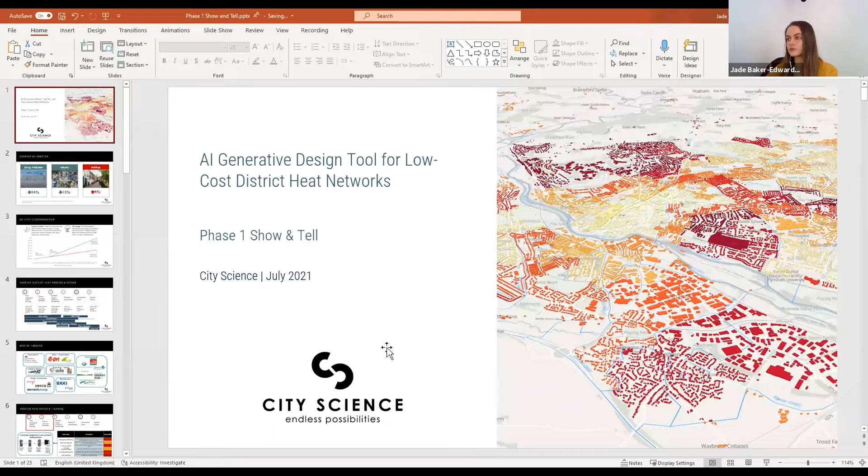Can you see that okay? Yeah, that's great. Fantastic.

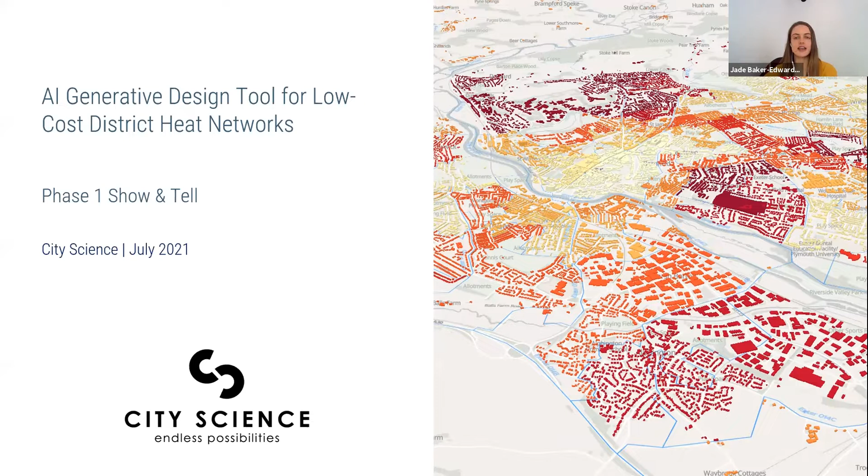Okay, so hello, my name is Jade. I'm an energy and sustainability consultant at City Science, and I'm the project manager of this project. So welcome to a quick summary of the outputs of our feasibility study entitled AI Generative Design Tool for Low-Cost District Heat Networks. So firstly, our key objective at City Science is to build tools and provide services that enable decarbonisation at a city and national scale. We focus on the three major CO2 emitting sectors of transport, domestic and commercial.

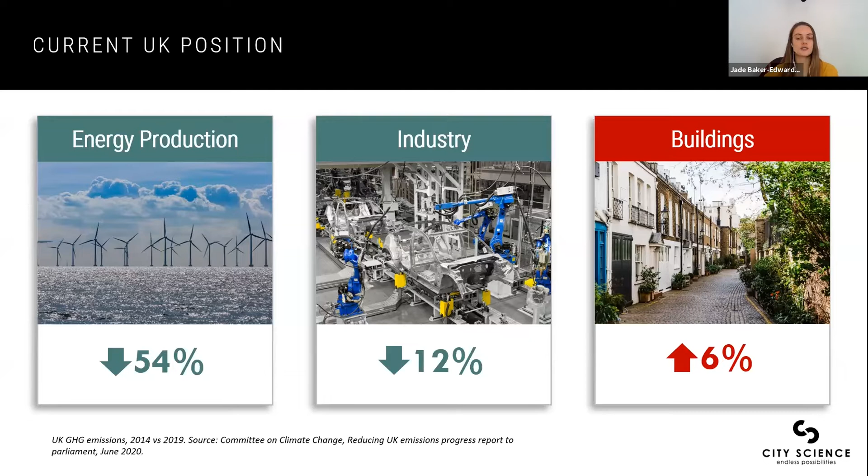And as a landscape, between 2014 and 2019, carbon emissions in energy production have decreased by 54% and industry by 12%. However, carbon emissions from buildings have increased by 6%. This indicates that building energy decarbonisation is a significant factor in achieving net zero. A majority of the energy used in commercial and domestic buildings is expended through space heating and hot water. For domestic buildings, this contributes 75 to 80% of energy, and for commercial, it's 50 to 60%.

There are two approaches for the UK to decarbonise buildings. One is to reduce the amount of energy used, and the other is to shift to low carbon heating sources. Now, the UK plans to address the shift to low carbon heating sources by scaling up the number of homes served by district heat networks. The government's 2050 target of 90 terawatt hours of heat served by heat networks per annum translates to around 6 million homes. However, our modelling suggests that at the current run rate, we will only reach 49% of this target, leaving us 3.2 million homes short.

So as part of our early research, according to HNDU funding applications, we found that over the last 3 years, only 25 large-scale district heating feasibility studies have been conducted per year. And our modelling suggested that only 52% or 13 networks progressed to build. So it's clear that intervention is needed to enable the scaling of district heating at a much faster rate. And this is a statement that was repeated by the many stakeholders that we engaged during the study. So the question is, how can we increase the number of studies conducted, and how can we increase the number of studies that then progress to build?

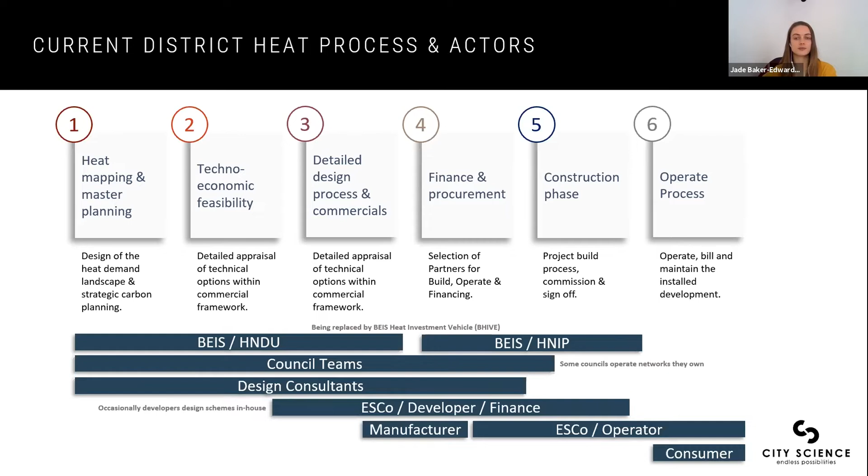To understand the barriers to scaling and how the design processes can become faster, we started by documenting the process to understand the steps, the stakeholders involved in each of those steps, and when and how each of the participants interacts with the system. Then we designed a user-centric feedback process to ensure that we engage with at least one participant who interacts in each part of the process. So in a highly human-centric approach, we interfaced with all the organisations you can see on the screen. So this scoped government bodies, those in regulations and policy, large and small design consultancies, of course the ESC as industry advisors, manufacturers of the components themselves, ESCOs and local authorities.

And the local authorities scope those who are highly engaged in district heating already, such as Islington, and those who aspire to be. So this approach gave us a comprehensive view of the pain points within the process and the pain points within the industry, and really provided feedback and validation throughout everything we produced moving forward. So each user had a different perspective on the approach that should be undertaken by us and had a unique set of requirements. And the engagement with the stakeholders consisted of one-to-one interviews, workshops, interactive feedback documents, videos, and surveys.

So in our discussions with the participants about the pain points, we found that the most significant delays occur during the first two phases, which is heat mapping and master planning, and the techno-economic feasibility stage. This is why our final solution is a tool that uses AI and generative design to automate the process of district heating feasibility studies. Out of the 13 common pain points that we identified, we created a solution for our new application that solved 6 of the critical issues in the process.

And these are incorrect or incomplete demand data, the many iterations and rework time needed to make the designs acceptable for all stakeholders, little incentive for developers to prove viability, competing stakeholder objectives, perceived value, and lack of access to capital because of the high perceived risks.

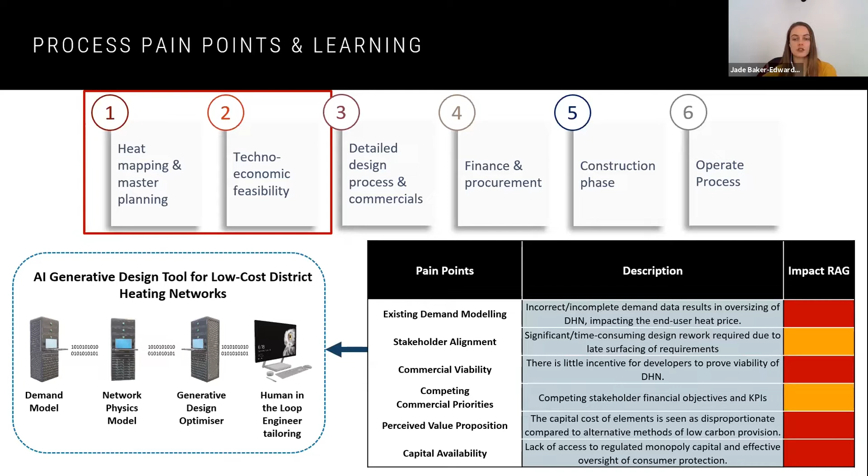We then produced our application design based on this user-centric requirement capture approach, which allowed us to have a single solution with the most buy-in. And the back end of the tool uses a demand model, a network physics model, a generative design optimizer, and human-in-the-loop engineering, which I'll explain in a little more detail in the next slide.

So the core of the application has two optimization loops running generative design. So in step one, the user inputs the details of their preferences and any constraints they may have. Then we run through the two loops. The first is the network physical design loop, which looks at the routing of the network. And the second loop then looks at the network equipment like pipes and heat interface units. Finally, the AI generative solution options are published into the human-in-the-loop design space.

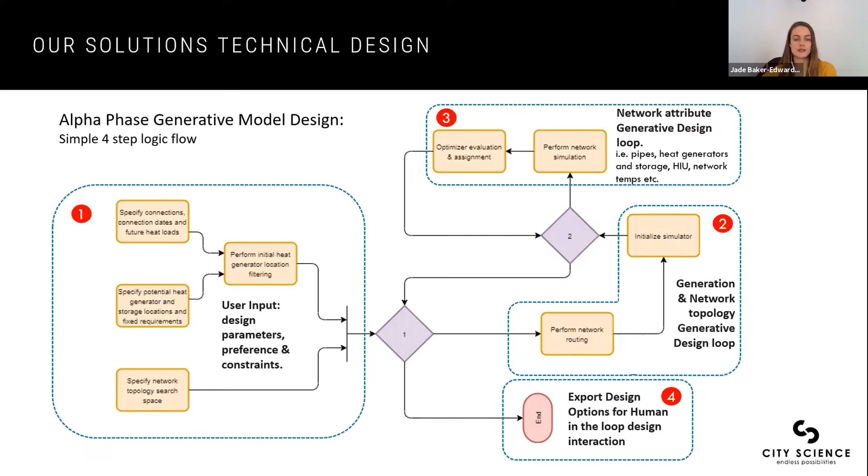Touching on the value proposition, the tool is aimed at design consultancies and local authorities. Design consultancies currently use a very manual Excel-based process, and it takes a long time to implement changes to designs. Local authorities who are engaged in district heating networks and have in-house skills will also be able to use the tool. Looking to the future, as government policies and targets place requirements for additional heat networks, it's likely that more and more local authorities will increase their capabilities and will also be able to use the tool.

And in addition, if local authorities can use the tool to quickly and cost effectively determine whether a district heating network is feasible, then the requirement of holding a heat network in a new development can be stipulated in the contract rather than leaving the decision up to reluctant developers. So although aimed at those particular stakeholders, the tool has been designed in a way to appease the pain points from stakeholders across the board to promote a seamless process, provide detailed information early on, and provide designs that are accepted by all.

So another aspect we heavily engaged with users on is the user interface prototype. Initially, a survey and discussions in stakeholder meetings informed the development of version 1, which included the key functionality of the tool. And following presenting the version 1 prototype to users via various means, feedback was gathered in order to inform the version of the user interface that you're about to see. And that's currently designed as a web application.

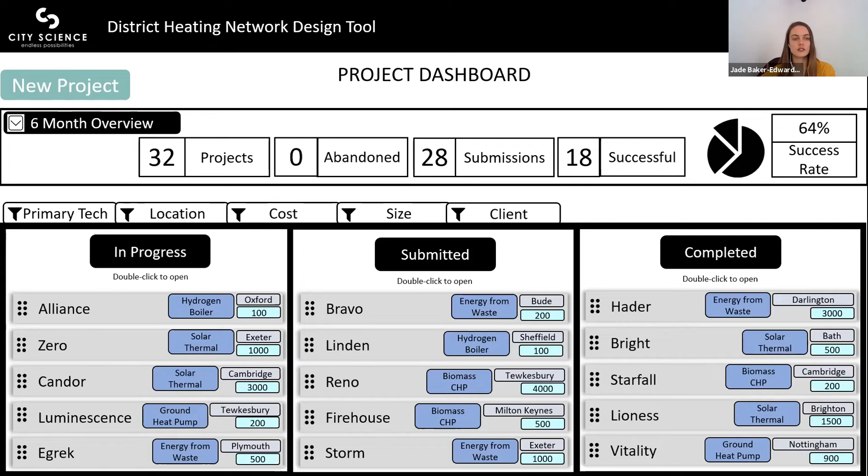Along the top, there are standard dashboard elements, such as the number of projects submitted, and the drop-down menu allows you to change the time period of these stats to suit company targets and reporting timelines. So once we click New Project, we give the project a name and provide further details.

This includes the functionality to enable data upload and manipulation for estimating the heat demand for both new and existing buildings, network dig and restoration costs, potential heat generation and storage locations, and so on. The tool can start with a low level of data granularity and then expand to the same model with more granular data as it becomes available as the project progresses.

So we plan for integration with a number of existing tools at this point, including Thermos, the Scottish heat map, as well as BEIS' heat zoning tool, which is currently being procured for England. So once we've uploaded the data, this page captures the preference set.

So that feeds into the underlying model to aid selecting and ranking the results. You can see that we have currently based this on CO2 emissions, OPEX and CAPEX. You can also drag any of the additional criteria, such as internal rate of return and net present value.

The second element, which adds user input, is the constraint function. So for example, minimum and maximum number of buildings in the network, maximum heat price that are comparable to counterfactuals, and financial constraints such as payback period.

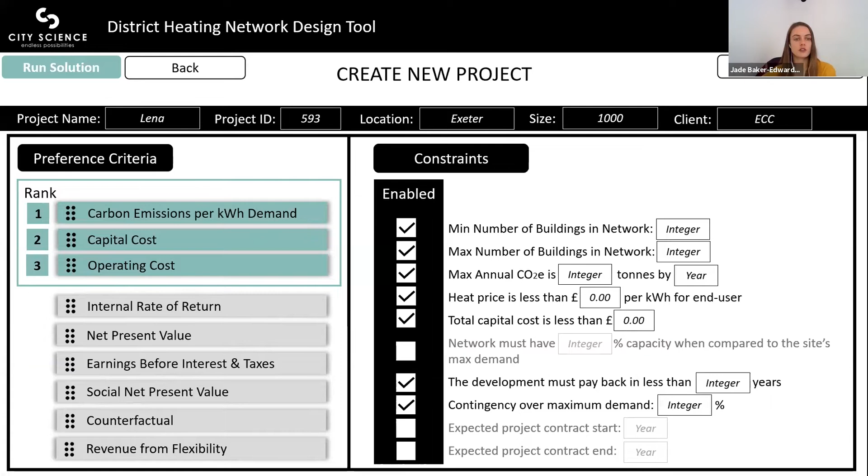So if we click Run Solution, this is where the back end of the model goes off and does its thing and uses AI generative design to set thousands of design options based on the user's preferences and constraints. And then it produces a range of optimized network designs.

So the search space includes energy center locations, types, and storage options, network routing and topology, building connections, buildings retrofit scenarios, pipe selection, as well as HIU and heat meter selection.

So the result is a list of scored and ranked designs that are within your constraints and optimized for your preferences. There is an option on all the pages moving forward to export the data as a CSV file and therefore integrates with the current processes that designers use.

And here the sliders allow you to filter the solutions in both the parallel coordinate graph and the solution table. You can therefore evaluate which one you want to look at in more detail. And in the graph, it gives you a quick overview on how the preferences were met. So for example, the gas turbine scored well on CapEx and OpEx, but of course, scores badly on carbon emissions.

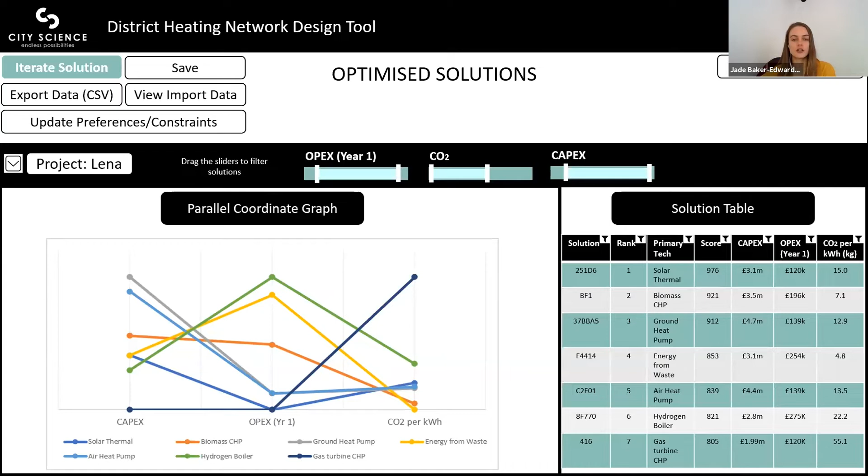So if we look at the hydrogen boiler solution in more detail as an example, we're provided with various options for a detailed analysis. So for now, if we select solution details, this opens out into more detailed information, including KPIs that were again suggested by the user stakeholders, scorings and rankings. We can see a schematic of the network here.

So this is a radial network design, and the graph here shows the Pareto front. So that's the selection of the most optimal designs of the overall solution run. So the solution we're looking at right now is here, and the graph allows us to explore the other optimized designs. So if we click to a different one, we're taken to the solution details page for that design. And within the tabs, there's a plethora of other analysis.

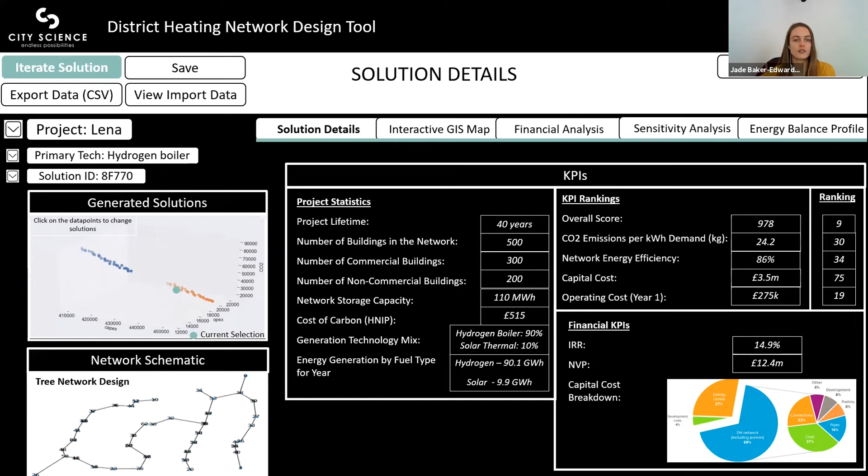So we have our interactive GIS map. So this was produced in the tool by the alpha phase. And this is where the human in the loop element comes in. So obviously we're aware that no matter how optimized a network looks to the algorithm, there's always going to be additional considerations. AI is never going to be able to replace the engineer completely, and nor do we want it to. Our intention is that AI and human expertise can be perfectly blended to produce viable, optimized results that are far more efficient than what is done today.

So this page is where the users can utilize their expertise to manually experiment with the connections, pipe storage, energy generation locations, etc., to build a network that really works.

So moving to the financial analysis, this tab provides different stakeholder overviews for different contract types. So when you click the contract type, you're presented with the relevant stakeholder roles, and then you can drag the ones that you're interested in looking at into the box, and then that auto generates an analysis. So if we click on project owner,

the financial analysis for project owner provides information such as annual costs, annual revenue payments, equipment, ongoing maintenance, and the payback period. It also gives a funding model. On the right, we have the net present value, cumulative net benefits, and the IRR.

So of course, each stakeholder will have different financial interests, and the tool allows you to select the stakeholder type to view information that's relevant to them. So if we change this to the site developer, for example, they might not be interested in payback, but instead might want to know the income from the project and ongoing OpEx.

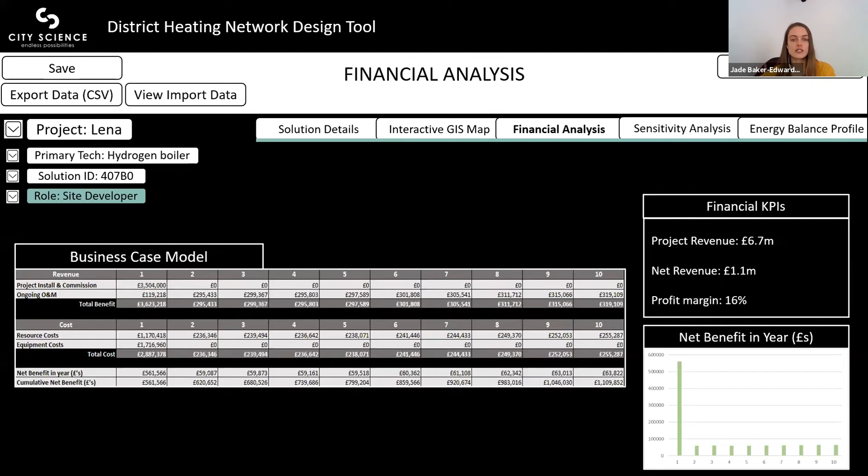Other tabs include the sensitivity analysis. So this tells you which elements in the model the business case is most sensitive to. So for example, in this case, the total benefit is 17.8 million. And we can see that if the price is reduced by 5% and the demand is reduced by 10%, the total benefit is 15.3 million. We can also see how build and operate cost fluctuations can affect the business case, and also how the benefits and costs interact.

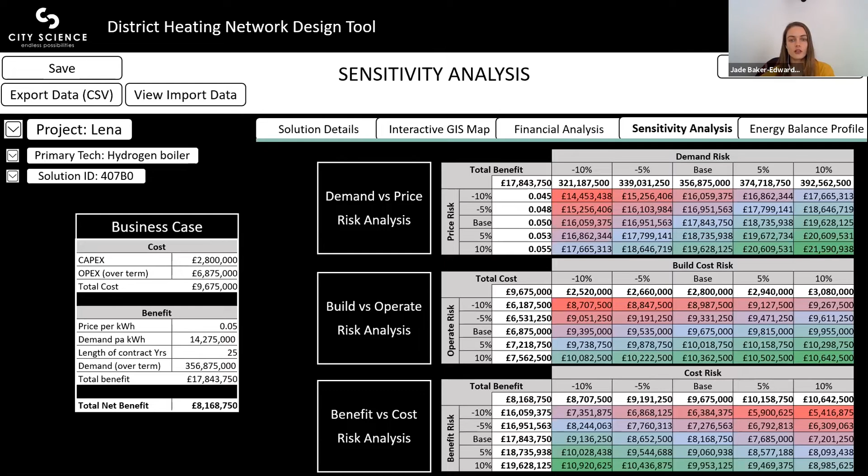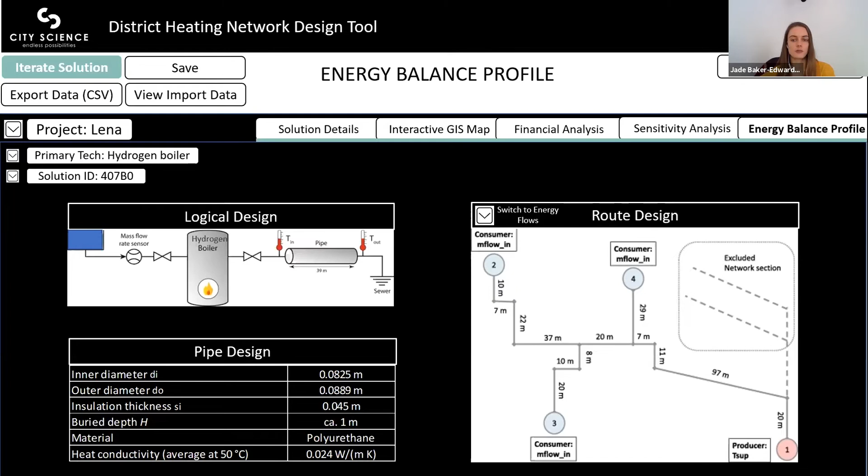Within the energy balance profile, we have the logical design of the main heat source. So this tells us what the network's delta T value is. There is an overview of the pipe design, including the heat conductivity and material diameters, etc. Within route design, we have the length of the pipe, and you'll also be able to switch between distance between pipes and junctions, and then the energy flows between those pipes. If I click log out to return to the presentation.

So within the process, we then tested the outputs and functionality of the underlying tool and the user interface against our question of how can we increase the number of studies conducted, and how can we increase the number of studies that progress to build, and how can this be sufficient to scale up district heating deployment. So we want to question, have we addressed the user's pain points, and have we removed the barriers?

Now, we found that compared to existing methods, the users estimated that our tool's process automation will speed up feasibility studies by 50 to 70% and reduce the cost of the studies. This will enable more feasibility studies to be conducted per year. And they said that the automation also will educate and enable less experienced users to test the feasibility of networks. So this opens feasibility studies up and partially mitigates concerns over skill shortages.

The users said also that our optimization and extensive exploration of the solution space is very likely to improve solution design. In turn, this will reduce the number of iterations required, and by optimizing the designs, more designs will be viable and more feasibility studies will therefore progress to build. Importantly, the tool is suitable for developing 4th and 5th generation networks, which is something that existing Excel-based modeling has trouble doing.

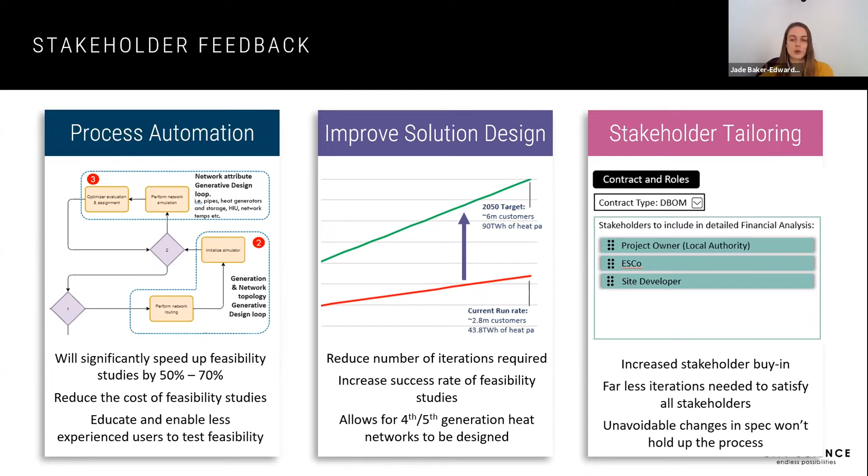So what next? So we have 3 key steps that we need to achieve in the beta phase, which will take all the learnings from the feasibility study to the next step. So firstly, we want to develop the application to a commercial quality level so that we can deliver service to the market. The aim is to develop it to at least a technology readiness level of 8, but there is potential for us to reach a TRL of 9.

Tomorrow we're speaking to our first organic customer inquiry for the project. It's a council who are planning to commission a traditional feasibility study solution for expanding an existing heat network and also retrofitting it with renewable generation. So they were going to go down the traditional route, but after catching wind of our project, they would like to discuss the possibility of using the tool to do this instead.

Secondly, we will continue with our user-centric approach and extensively test the application through private and public beta so that we release a quality product that delivers the value stream. We already have a fantastic partner on board for testing as well. And number 3, we will ensure that the solutions that are created by the AI are fit for purpose in the real world. And we will test against industry benchmarks and further enhance the route to market planning.

So this concludes our presentation, other than to say a heartfelt thank you to all the stakeholders listening that so generously offered their time and contributed to shaping this research into the exciting project it's turned out to be.